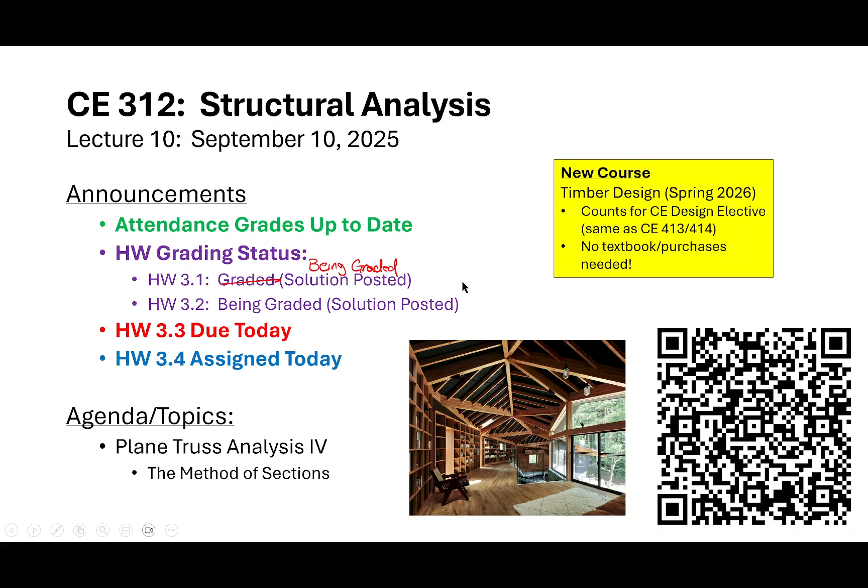I kind of think lecture might end a little bit early today because, I'll be honest, we're going to do the method of sections today, and we're going to do it because I think there's no structural analysis course that is complete without addressing both the method of joints and the method of sections. But I won't deny that I prefer the method of joints over the method of sections. Now, I'm not saying the method of sections doesn't have its uses - it does, and we're going to talk about that today.

But I do think the method of joints is far more globally useful because, more often than not, when we're analyzing trusses as structural engineers, we need everything. We don't really have the flexibility in practice to design half the truss and not worry about the other half, letting somebody else do it. It doesn't work like that - you have to design the whole thing, you have to analyze the whole thing. If you're going to assess structural deformations, you have to analyze the whole thing. In fact, you have to analyze the whole thing twice.

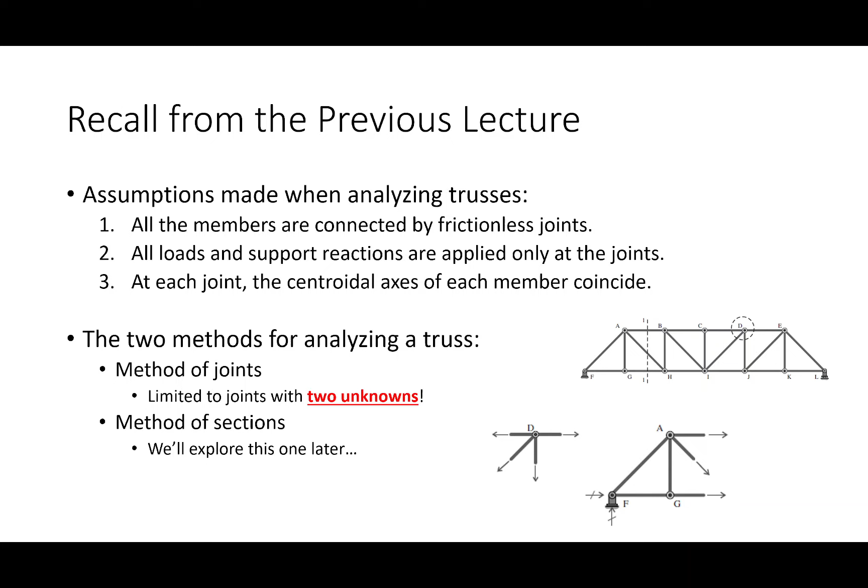Okay, so there's no real way of getting around the method of joints just being more thorough. But we are going to talk about the method of sections. And why is it skipping ahead another slide? I think my pen likes me today.

We are going to discuss the method of sections today because there are some advantages to it. I don't want to totally trash it. There are some advantages, a couple things worth pointing out. How many of you are planning to take a 6-hour-long test next year? That's abbreviated by the term FE, right?

So a very classical problem on the FE exam is: here's a truss, tell me the force in this member. Doing that problem with the method of joints would just take a long time. The thing about the FE exam is I don't believe it's a particularly hard exam, but it is a long one. They don't ask incredibly challenging questions, but they ask a lot of them. And there is a time sensitivity to the exam. So if you're spending a lot of time utilizing the method of joints, you could be eating up time you could spend on other problems.

So there is something to be said about the fact that the method of sections can be more expedient if all you're trying to do is find a force in a member that's down the way. So that's one advantage to it.

Another advantage is that it serves as a spot check or gut check for some of your computations. Hopefully you should see now as you're doing your truss homeworks that if you do it right—to use a phrase from differential leveling or geomatics—a truss analysis has a way of closing at the end.

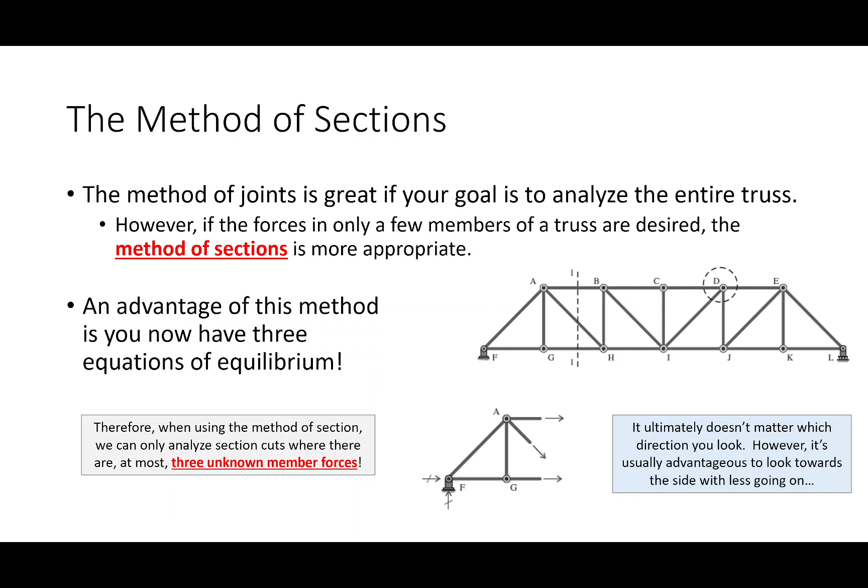Okay, so we are going to do this problem. Let me pull this up on the notepad and let's get to it. I'll give you all a sec to jot this down because there's a lot going on here. So I've got a truss, and we are ultimately going to solve for three members of the truss.

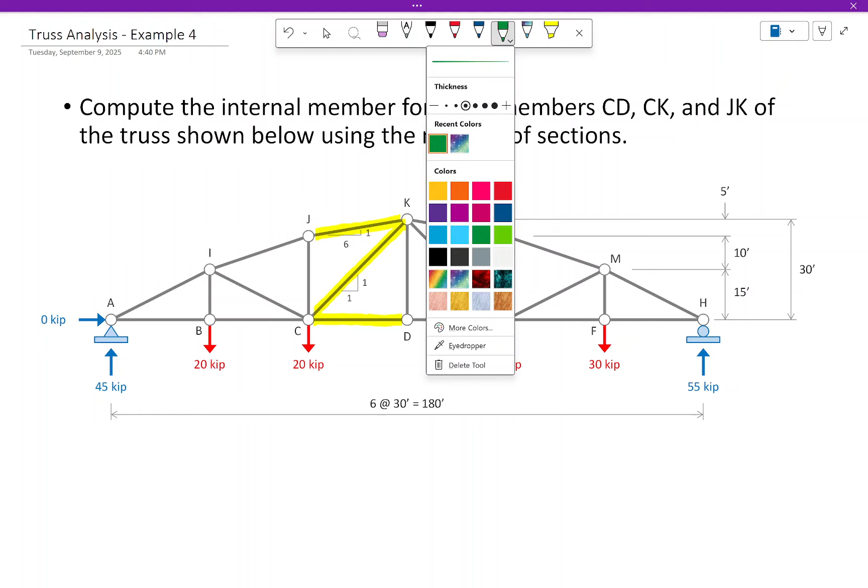And those three members are CD, CK, and JK. I'm just taking my little highlighter and highlighting the three members. I didn't explicitly tell you where to cut the section in this problem, but remember the method of sections limits you to three unknowns, and those are three unknowns. So I don't think it's really that much of a stretch to just cut the section like that.

Whenever I cut sections, I usually will call it like section 1-1 or section 2-2, much like you would see on a CAD drawing. Now, you might call it section AA or section BB. I usually just do it by numbers. I guess if you wanted to use a little bit more CAD notation, maybe we'll do that.

I don't normally do that, but ultimately what I'm going to do is cut a section and look this way. And the reason I'm cutting a section and looking that way is just because there's less going on. I think there's just less members I'm going to have to redraw, less that I'm going to have to handle or deal with. So I could get the same answer going the other way, but it doesn't really matter.

Okay, a couple other things worth mentioning. I've got loads, I've got reactions. The loads are not symmetric, so that's not a typo. This is 20 and 20, that's 30 and 30. So this reaction is just a little bit smaller than this one. This reaction is 45 kips, this reaction is 55 kips. So that's on purpose. No horizontal reactions, so that's 0.

And then I did go ahead and give you the slope ratios for these two diagonal members. So that one's at a 1-to-1 because we go over 30 and up 30, and this one's at a 1-to-6 because we go over 30, but we only go up 5. So 1-to-6.

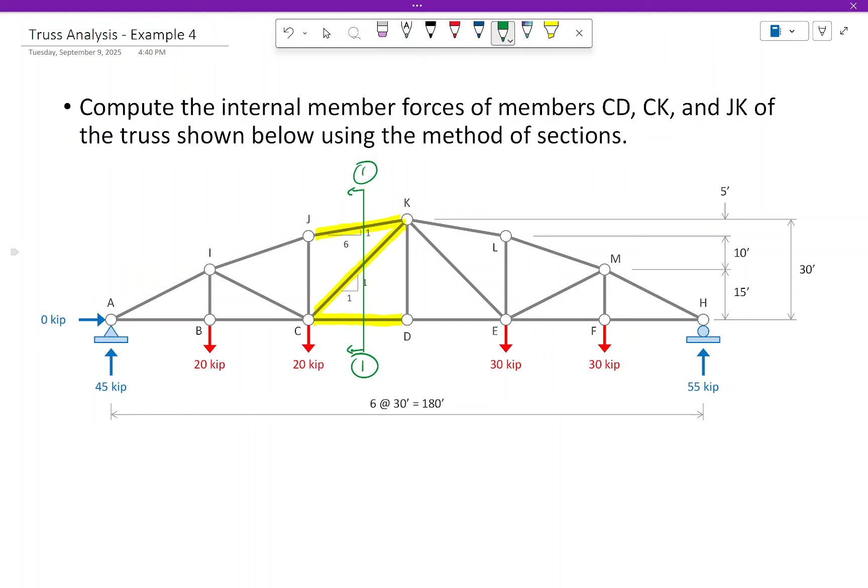Now, unfortunately, again, with the method of sections, if you want to do it properly, you're just going to have to draw this all over again. So what I'm going to do is I'm going to cut this section, and I'm going to redraw the truss looking to the left. Again, my apologies for all the redraws, but it's just kind of the nature of what we're doing here.

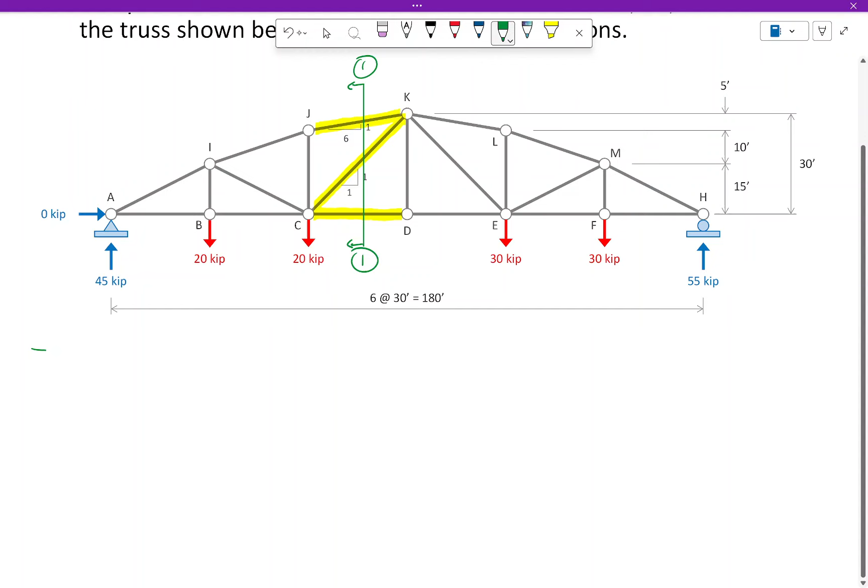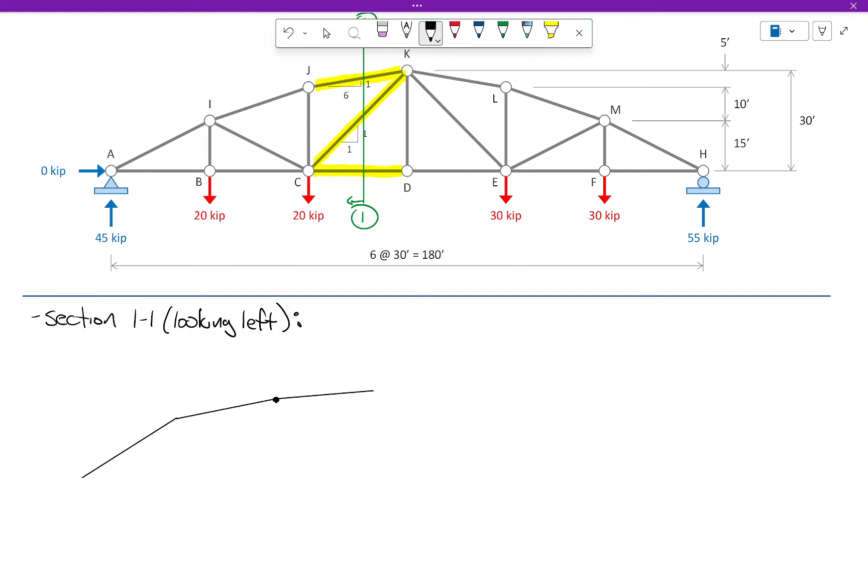Okay, so I will try and keep that truss in view as much as I can. I'll admit, it's kind of tough writing on the really bottom part of the screen. All right, so let's do that. Bear with me, I'm going to be doing a little bit of extra drawing probably than what you see here.

Okay, all right, so there's that. And we're sort of cutting the section. So this is joint A, B, C. We're sort of cutting the section like this. So what I'm going to do is I'm going to sort of imagine I'm cutting through the truss right here. So we'll cut through like that. And then we'll sort of imagine that the rest of the truss sort of continues on like this, past the section cut.

But really it's not there. This is the actual physical part of the structure, and this is what the structure would look like past the section cut. I'm drawing those lines because if we sum moments at a particular location, you'll see what we're doing. Maybe we'll use them, maybe we won't.

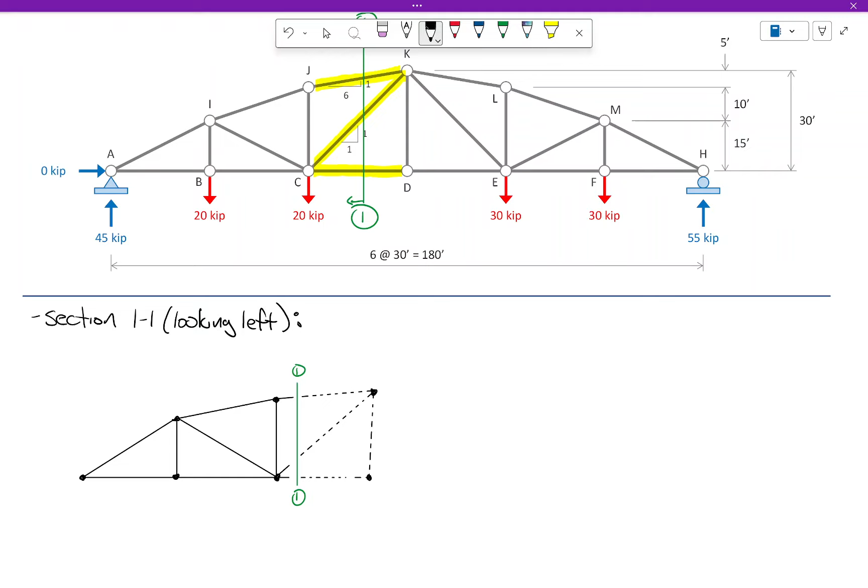I'm going to scroll this down a little bit and try something. Yep, I'm cheating a little bit, I made that a little bit bigger. So I cheated a little bit there, my apologies.

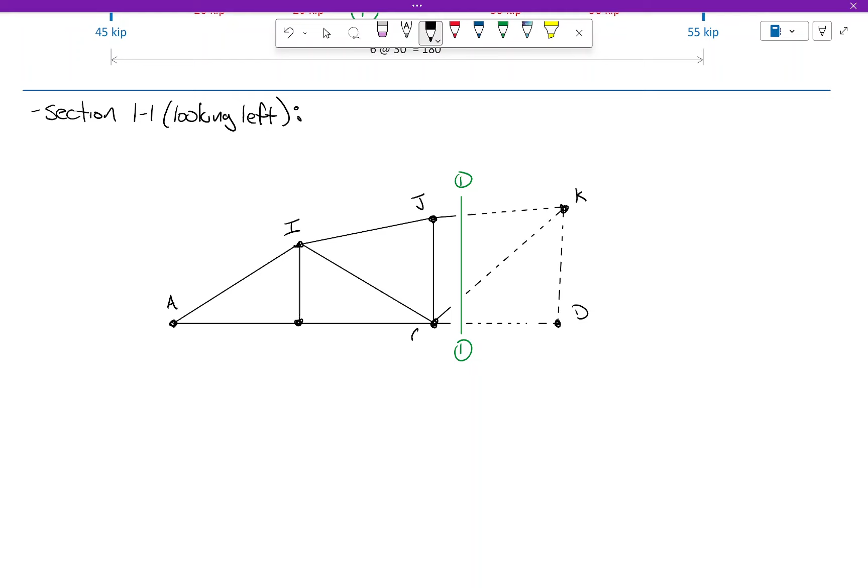Okay, let's start labeling this. This is joint A, this is joint I, this is joint J, this is joint K, this is D, this is C, this is B. Let's also put our loads down. This is 20, this is 20. Then there's a reaction there of 45 kips.

All right, let's put some dimensions on here. Sorry, it just takes a little while to do this, and I want to do it together to make sure we're all comfortable with what we're doing, because you all are going to have to do this. This vertical dimension is 30 feet, and each of these dimensions are 30 feet.

I spend probably a good bit of time trying to make this neat, but I really think that helps clarify what you're doing. Taking a little bit of time to make this neat really does make a big difference.

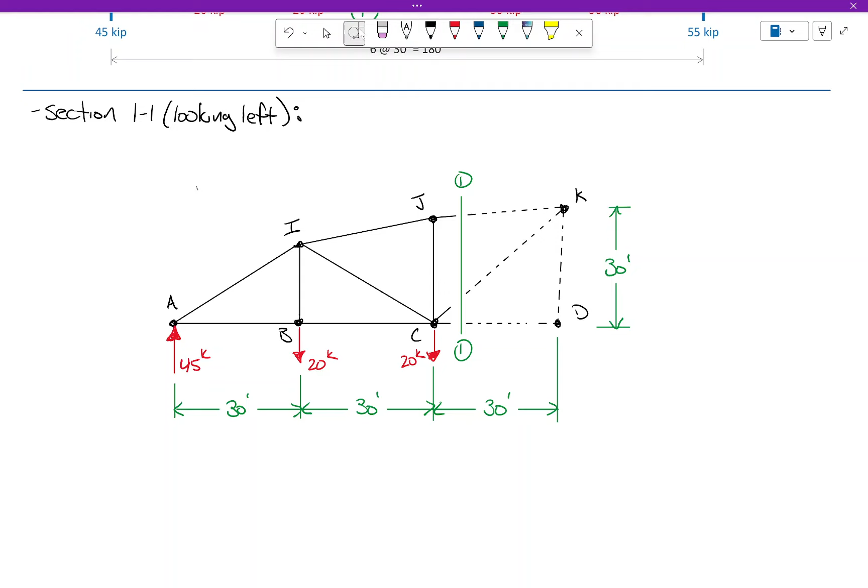I'm going to cheat one more time and scoot this over a little bit. Let me erase this. So we're going to have that dimension, that dimension, that dimension. That's 15 feet, that's 10 feet.

A lot going on there, I know. All right, so that's our section cut. Now, the one thing we have not yet identified are our unknowns, so let's do that.

One thing I'm going to do for the unknowns is I'm going to assume that they're all in tension. I find that easier from an analysis perspective when you have a lot of unknowns like this. So we'll call this CD. For the vertical and horizontal here, what I'll do is I'll put these like this.

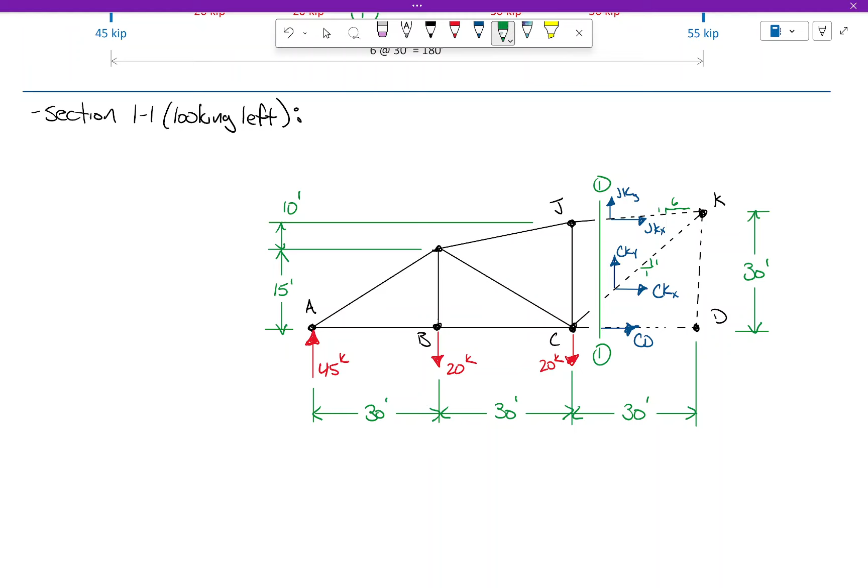So let's put a little note over here off to the side, I'll put it down here: all the members are assumed to be in tension.

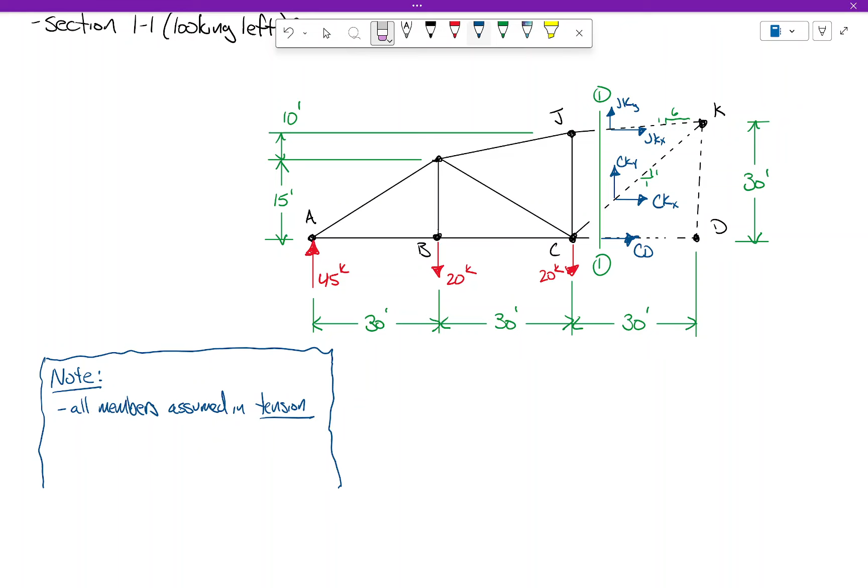And I do want to recall something with you all. It's been a while since we probably looked at this. I want to recall, and we talked about this in statics, the principle of transmissibility. What is the principle of transmissibility? It's been a while since we talked about this, so let me explain what it is.

All right, so we have a point, we have a force. Call this F. Now this force has a line of action. I'm going to bring up a cross product just once. Do you remember how we defined a moment? We said R cross F. Do you remember that? What was R?

Well, not quite. R, in this case, was a vector that pointed like this, and it went from the point in question to this line, the line of action of the force. If you remember from statics, it does not matter if R goes from here to here, here to here, here to here. You could have R1, you could have R2, you could have R3. It doesn't matter.

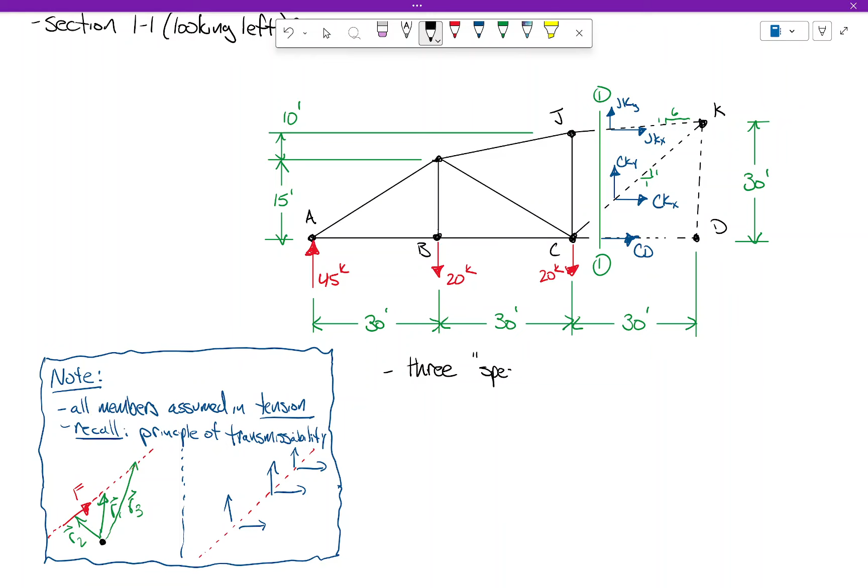So let's talk about that. I propose that there are three, and I'll call them special, locations about which to sum moments.

Now I'm going to give you one. Let's start off with one. Let's start off talking about joint K. Can somebody tell me, why would you sum moments about joint K? What would be the advantage of summing moments about joint K?

Well, you're solving for these three members, CD, CK, and JK. Joint K is where this member and this member intersect, right? So what I propose is that if you sum moments at joint K, that eliminates those two members.

So let's follow this through. If I were to sum moments at K, what would I be solving for if I did that? CD. CD, is that right? Everybody good with that?

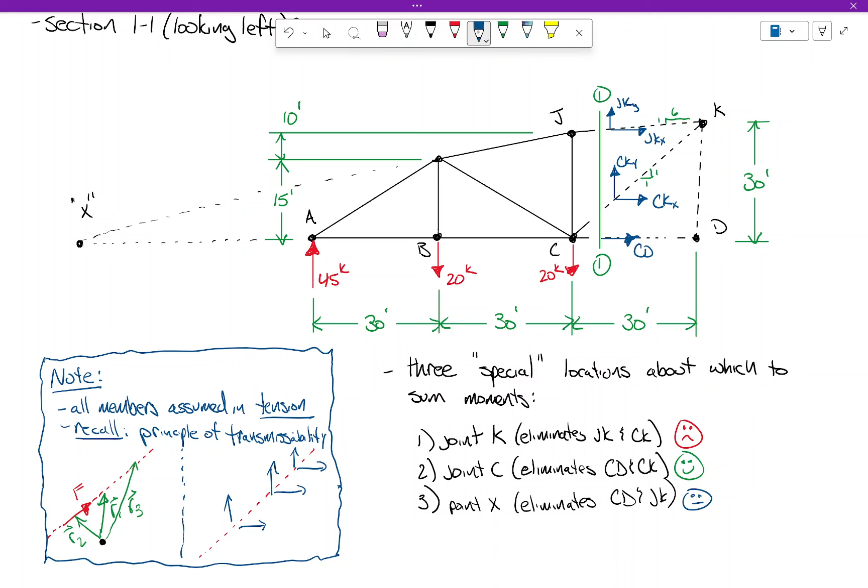All right, so we're going to sum moments at C. Let's strategize this, because this isn't going to be that challenging. So we sum moments at C. Do we have to consider this 20 kips?

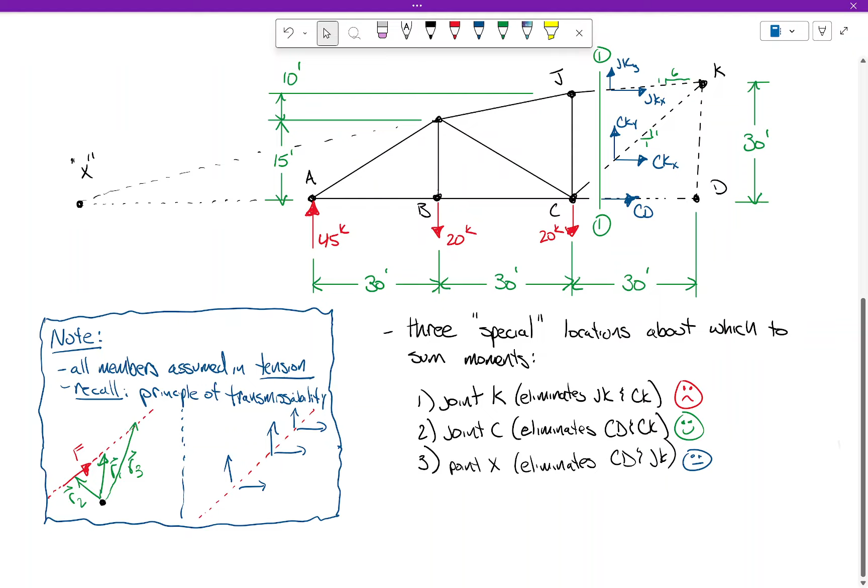We're going to have this 20 times 30 going this way, and 45 times 60 going the other way. Okay, I'm going to have to do a little bit of scrolling, my apologies for that. So this is going to be 45 times 60 and 20 times 30. Does everybody see that?

Now the only thing left to figure out is an unknown. Let's scroll back up a little bit. So what's our unknown? We're summing moments at C, so we don't need to consider anything for CD, and we don't need to consider anything for CK. So we only have JK to consider.

Remember how I said that with member JK, with these forces right here, I can take this and slide it along that line as much as I want? What I'm going to do is slide it over there. Now, why am I sliding it there? Because where am I summing moments? Right here. See, the vertical component goes right through, so all I have is a horizontal component times what moment arm?

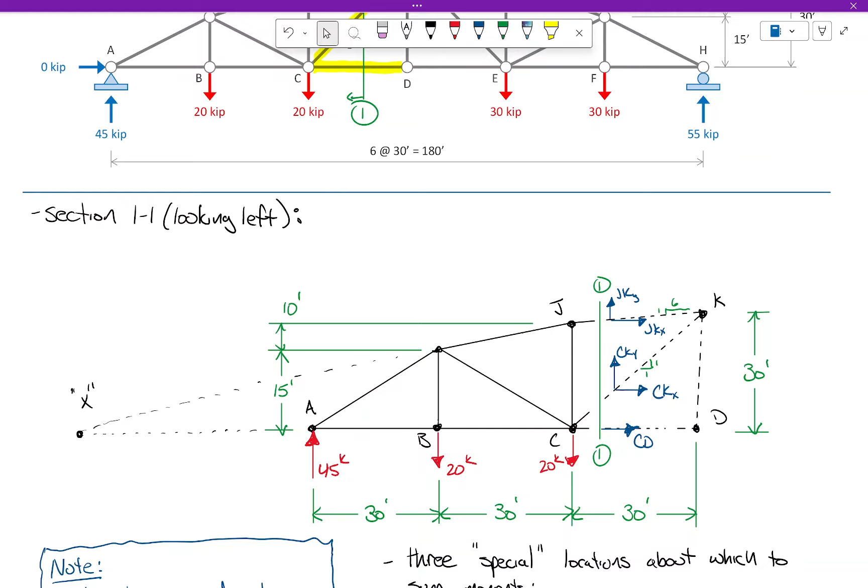25 feet, that distance. Does that make sense? Because it's this force going this way times that moment arm, that comes right there. This is one of those reasons why I take a little bit of time to draw the figure out — it makes the problem go a lot easier. So that's going to be on this side here, JKX, 25 feet. Okay, so now we can rock and roll.

Plus, okay, 45 times 60, I think that's 2,700. This is 600. So,

that means, what does this mean for JK? What are we going to get for JK? Negative 2,100 — yeah, but divided by 25. Oh yeah, we got it. But you're right, it's negative. I didn't get that — anybody have an answer for me on that? Negative 84 kips? Okay, so we had JKX pointing to the right, so it's actually pointing to the left.

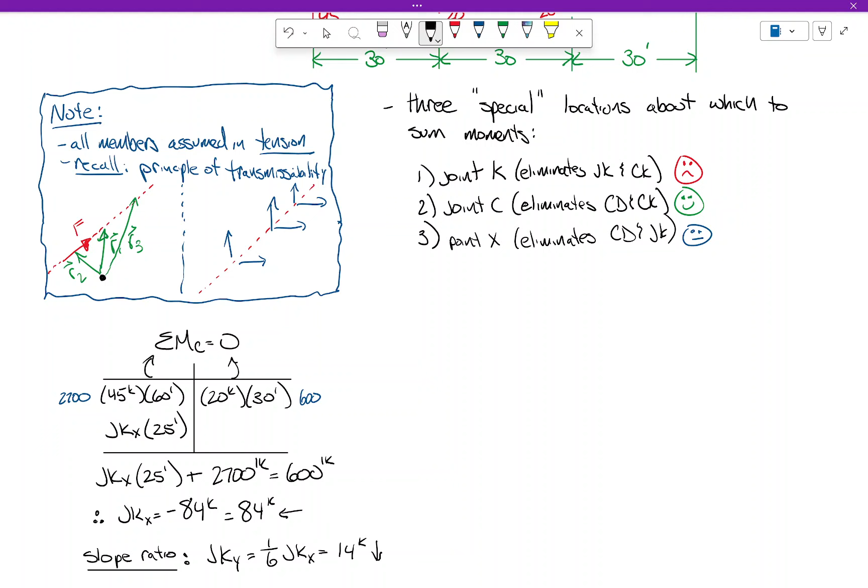And what direction is that going to be? Down, because we assumed upwards, but we were wrong in that assumption. We assumed everything was in tension, but JK is in compression, so that assumption was wrong. All right, let me scooch this over just a tad. Okay, all right, everybody with me on that?

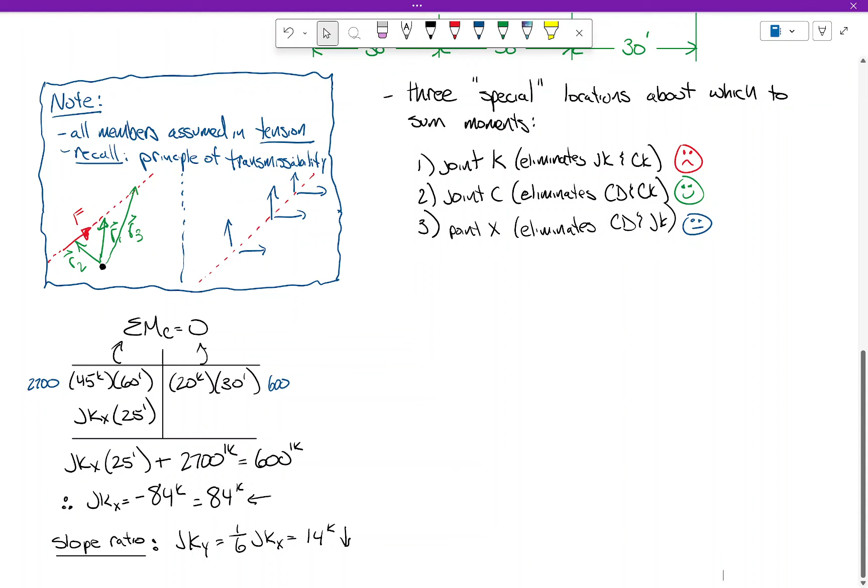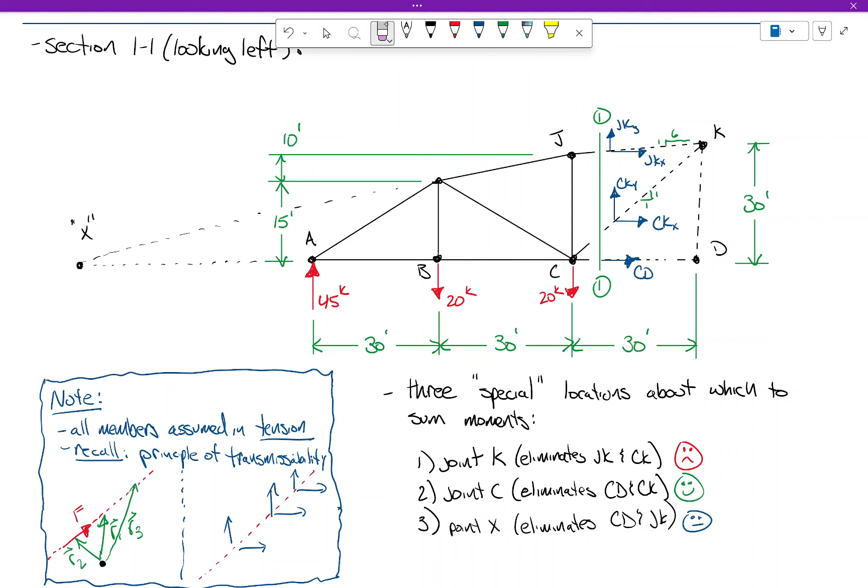Okay, so let's go back up to the schematic here, and you all can do the bookkeeping however you want. Sometimes what I will do is go over here and say, you know what, I'm going to erase this. And I'm going to say, actually, it's going this way.

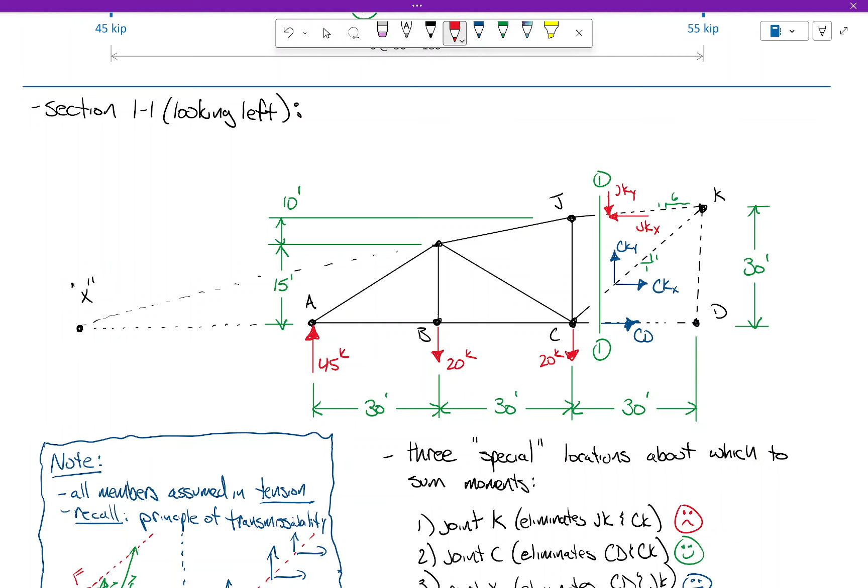So if you want to change the direction of the arrows, or leave the direction and just use negative values, either one's fine—whatever is easiest for you from a bookkeeping standpoint. So I think that's probably fine for this. Just so long as we know that JKY is actually pointing down, and JKX is pointing to the left. So what do we do now? Tell me the strategy. Now that we've got this solved, how do we solve for the remaining ones? What comes next?

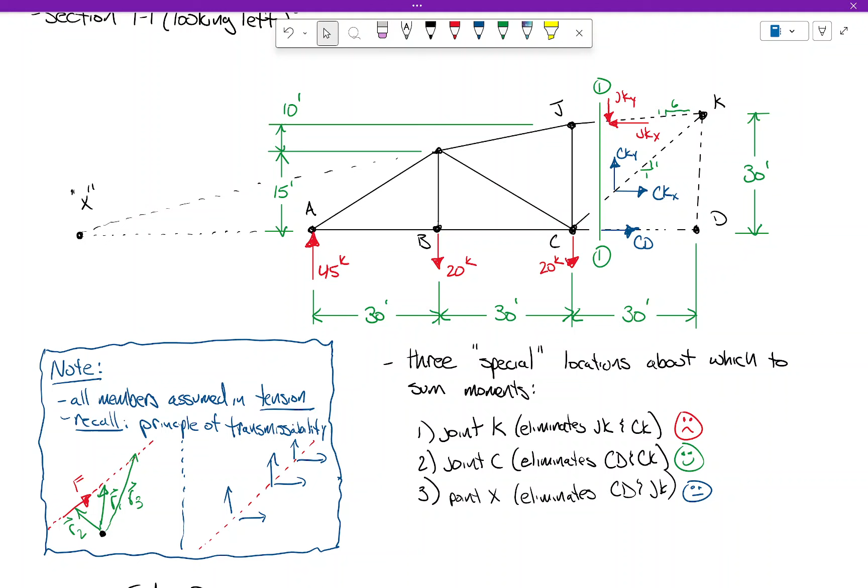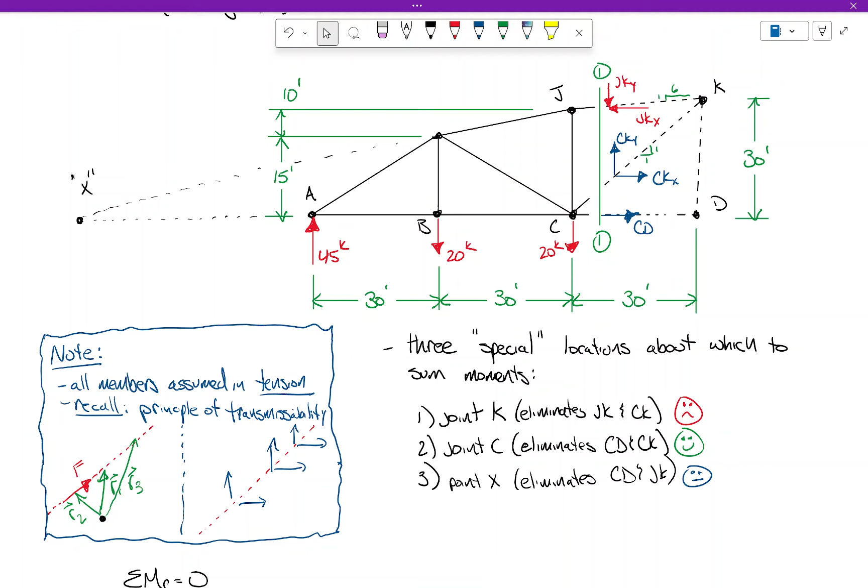Do we sum forces in the X first or the Y first? The Y, because we only have one unknown vertically, and two unknowns horizontally. So we'll sum forces in the Y direction vertically. What do we have going up? The only thing going up is 45 kips and this unknown. Everything else is going down—20, 20, and that. So let's see what happens.

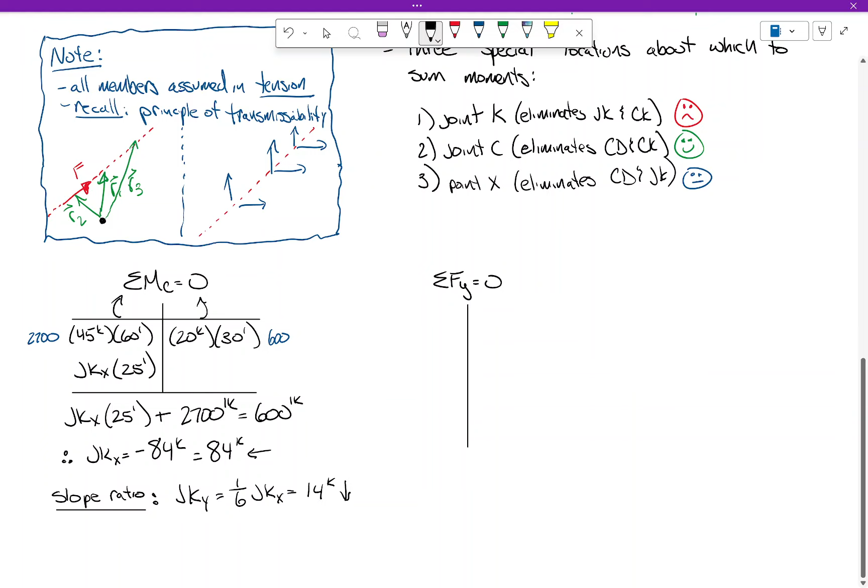So 20 and 20, and our JKY, and then this is 45, and then our unknown CKY. Then 20 and 20 is 40, plus 14 is 54. So, is CK positive? CKY, yep—so that's going to be plus 9 kips, and that's going to point upwards because that's what we assumed, and that assumption was correct.

So what's the slope ratio for CK, remember? 1 to 1. That means the slope ratio says CKX is also 9 kips, but which direction is it acting—right or left? The right.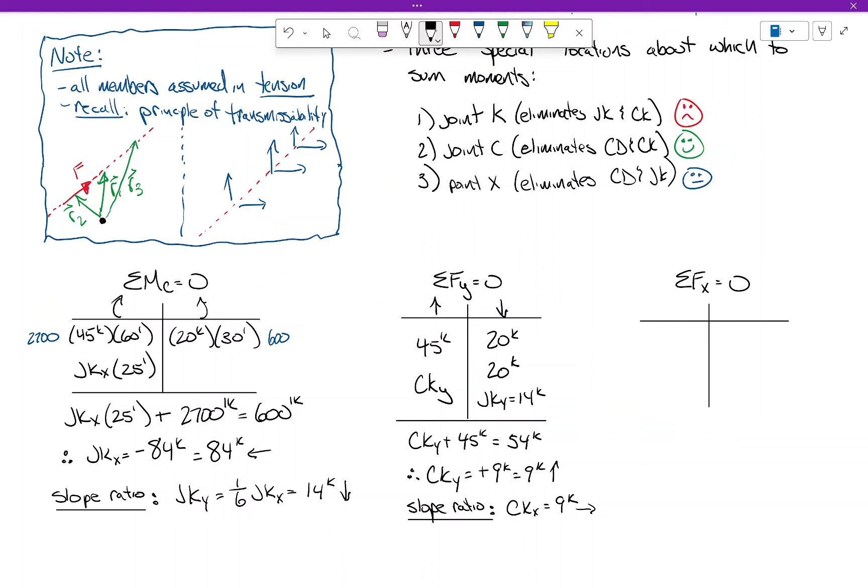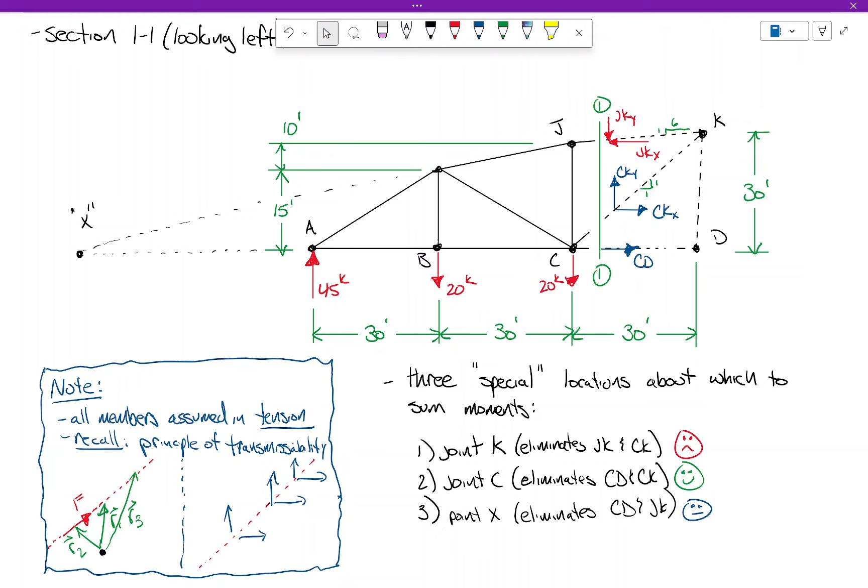And then summing forces in the X direction. I don't like scrolling up and down as much as I have on this problem, but these problems just require a big figure. So the only thing we have going left and right is JKX, CKX, and CD. This one's going to the left, this one's going to the right, this one's going to the right. Let's see what happens. So we have JKX going to the left, which is 84 kips. Then we have CKX going to the right, which is 9 kips. And CD going to the right. I think that one's pretty easy.

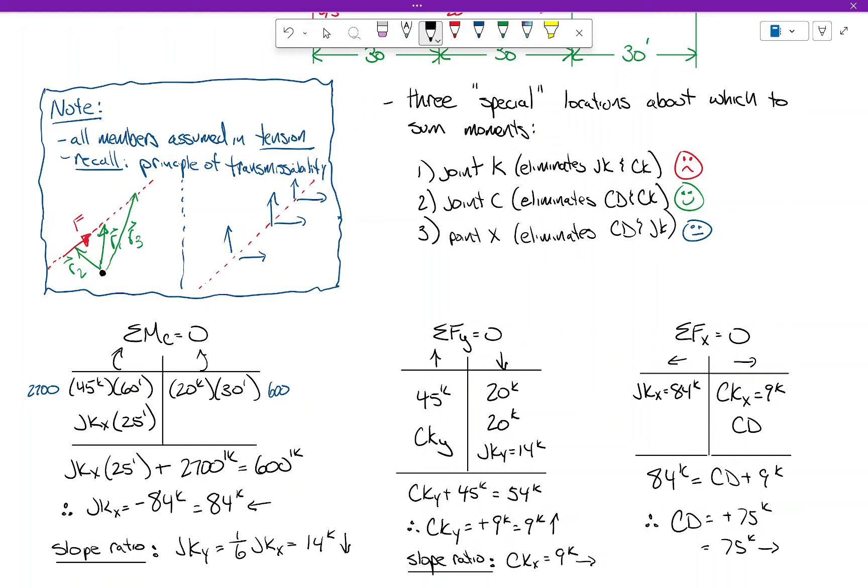Any questions? So what's our answer for this problem? Let's just do this.

We have CD, CK, and JK—those are our three members. Let's just do the simple stuff first. Is CD in tension? Is CK in tension? Yes. Is JK in tension? No. So it's going to be tension, tension, compression.

Now how much is CD experiencing? That one's easy, that's just 75 kips. Should JK be compression? Oh yeah, I just said it, and then I wrote a T. I literally just said it.

I do make mistakes. You're allowed what, like 5 a year? 7. But I'm the one keeping count, so it's a corrupt system. Yeah, no honor system in civil engineering. There's no honor system in the civil engineering department. It doesn't go well on a T-shirt. Takes up a lot of space. Yeah, it does.

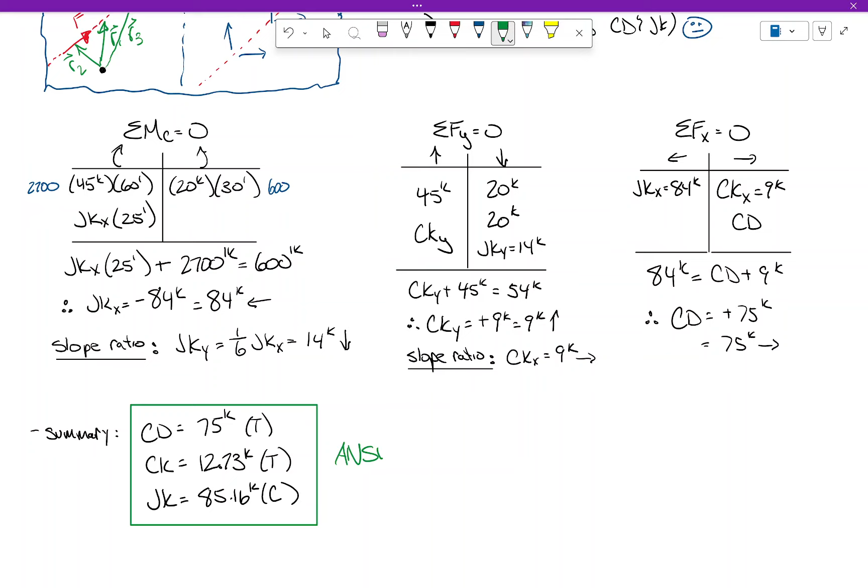Seems so easy when you do them, you know? My goodness. What I'm getting at, though, is what makes these problems easy is doing the figures properly. Take the time to draw them neatly. When you rush through the figure, it will cause this stuff to be harder to follow—like, is the distance 20? Is it 25? That's where mistakes start to happen. It takes a long time to draw the figure, but I think your net time on the homework will go down, because spending more time on the figure means spending less time fixing errors. That's what I'm getting at. Any questions?